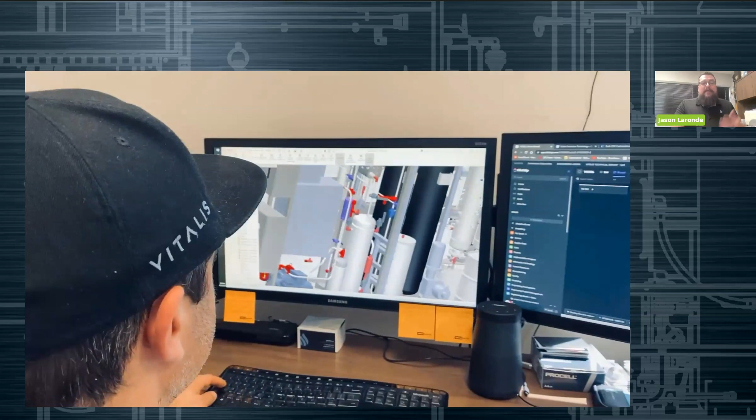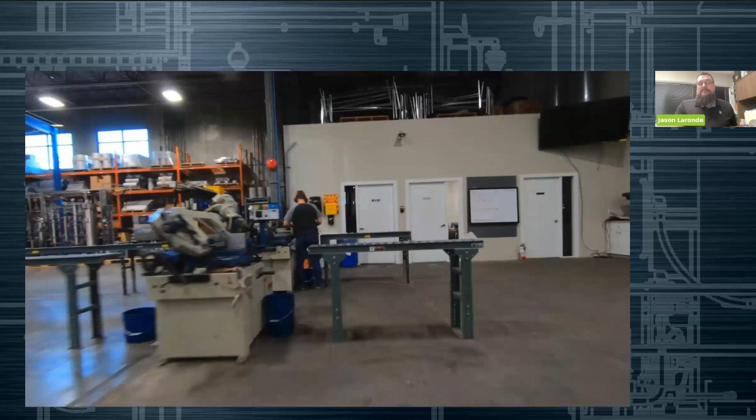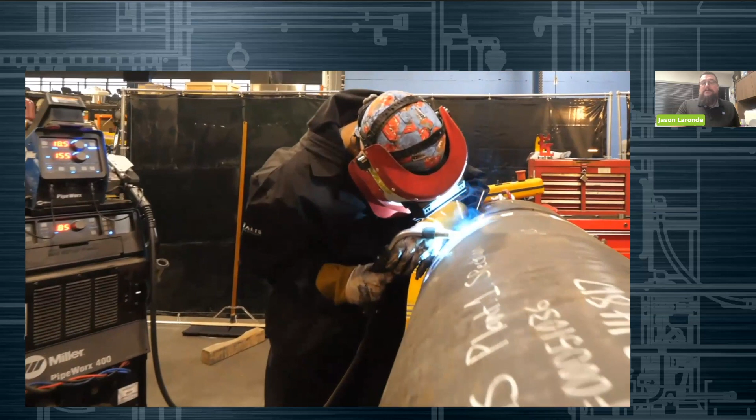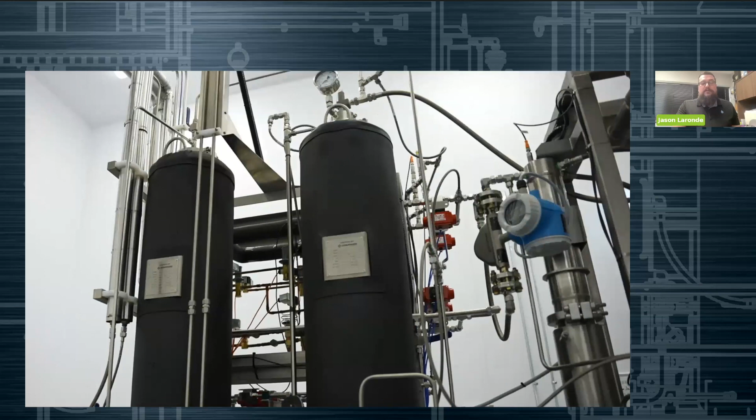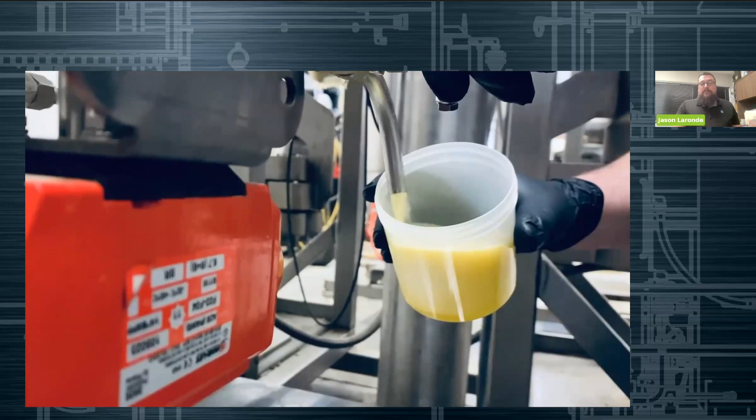Our mission is to help producers thrive while becoming more resilient and future-proof. We do that by utilizing unique properties of CO2 in a number of different ways, like extracting and refining natural ingredients from biomass, or employing CO2 as a heat transfer fluid as a natural refrigerant, or recovering and distilling CO2 for repeated use in applications ranging from extraction to brewing and high-proof spirits. We have over 150 installations on 5 continents, and our CO2 expertise is recognized worldwide.

I am Jason Laronde, Sales Manager at Vitalis, and I am your host for today's webinar. I joined Vitalis shortly after its inception in its lead up to the federal legalization of cannabis in the Canadian market. Since then, I've had the privilege of working on nearly 100 deployments of our 150 installs across 5 continents, with customers ranging from the largest multi-state operators to multiple EU GMP certified facilities actively distributing pharmaceutical products across the globe today. I have been a key member of the launch teams that have brought commercially successful co-solvent extraction to the market, automated inline refinement, and R744 natural refrigerant technologies to the cannabis and many other industries.

Today, I am privileged and would love to welcome Mark Webb, renowned chemist, educator, and extraction specialist, as a special guest. Mark. G'day, guys. And if you hadn't worked out, I'm from Australia, the land down under.

Since the early days of the cannabis industry, the wholesale and retail value of cannabis and its derived products have steadily declined, and what was once referred to as the heyday has now reduced to levels that make profitability extremely challenging, particularly with equipment and processes that at one time made sense, because the economics were so disproportionately profitable that basic business fundamentals didn't really matter to be profitable. This, along with many other factors such as taxes, regulation, a flood of other players to the market, and increasing investor sensitivity, has had a serious impact on the value and perceived value of companies producing cannabis products.

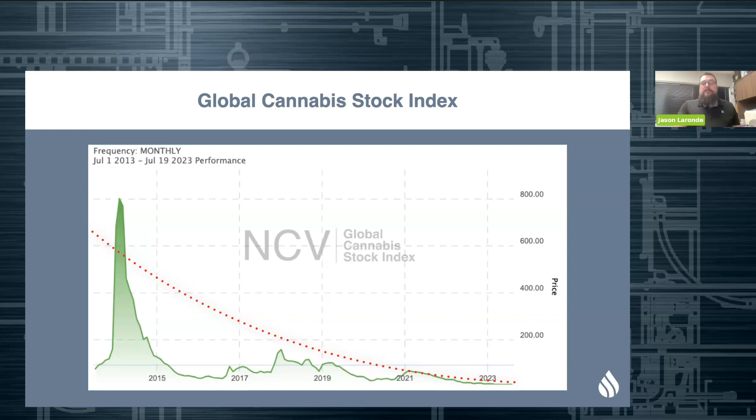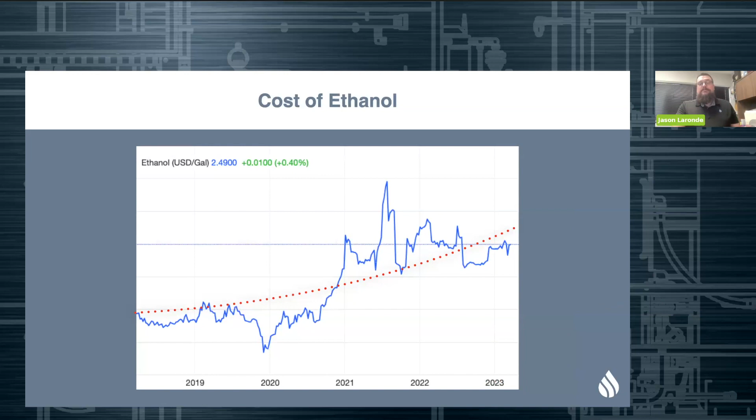In that time, the cost of goods sold has increased steadily. Consumers and consumables such as extraction solvents have increased significantly, and the average wage and benefits to employ the people that make these products possible has risen faster than nearly any other period in history.

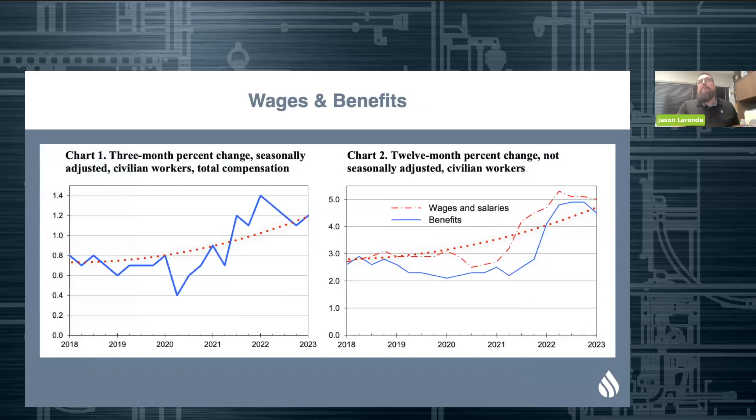As a result, many producers find themselves at a crossroads between their cost of goods sold and the price compression that for many businesses clinging to their current methods of production is unsustainable. New technologies that reduce the time to produce, decrease the headcount required, reduce consumables, eliminate steps in post-processing, and allow producers to manufacture more SKUs with less equipment is one of the largest levers forward.

There are a number of processes available, with the most common in the traditional sense being CO2, ethanol, hydrocarbon, and solventless methods. Every processor will have a champion that will tout the benefits of one or the other.

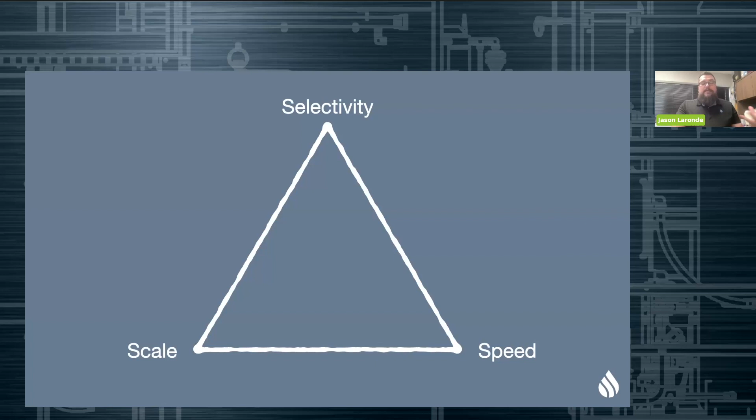Ethanol has been a great go-to strategy for some of the largest players in the industry, but with the trade-off of extremely costly solvents, high energy costs to refrigerate, recover, and purify this solvent for reuse, and the need for facility safety improvements that can evaporate any cost savings that the capital equipment originally afforded them.

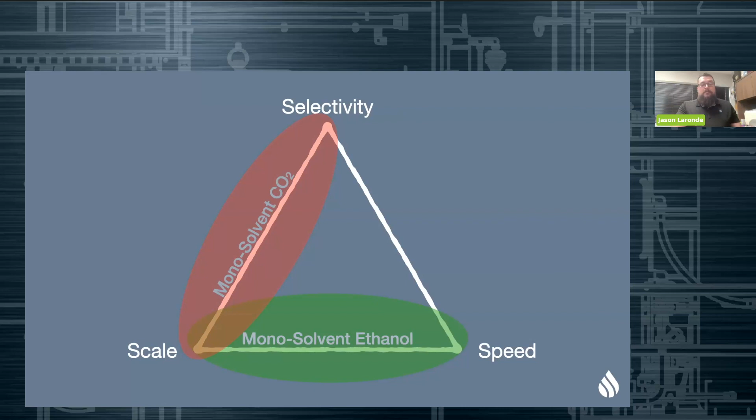CO2 monosolvent, or CO2 by itself, or supercritical CO2, has always been known for its selectivity, and in some operations, its terpene retention and its product purity, but usually with extremely high capital equipment costs upfront and additional post-processing equipment downstream.

Hydrocarbon extraction, while capable of making some extremely desirable products, in almost all cases carries with it limitations with scale, some of the highest and most costly facility safety improvement requirements in the industry, and in many jurisdictions, it's not even permitted. Above all, everything I've just mentioned is the same calculus that every player in the industry is weighing.

So if you think that you have an edge in your market using these common methods, understand that your competitors have the exact same options available to them with the same economics. Solventless extraction can create some extremely high valuable products with minimal equipment, but with the trade-off of catering to a smaller overall market segment.

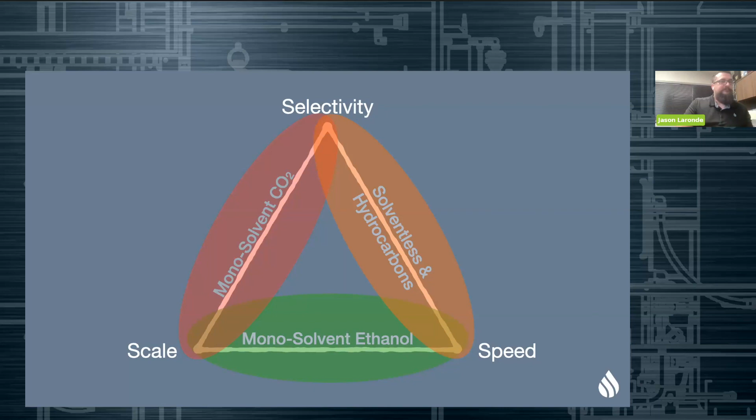Vitalis launched its Cosolvent injection system, the first of its kind to use a unique combination of extremely low pressure subcritical CO2 and very small injections of ethanol to provide its customers with selectivity, scale, and speed where other manufacturers have failed to deliver.

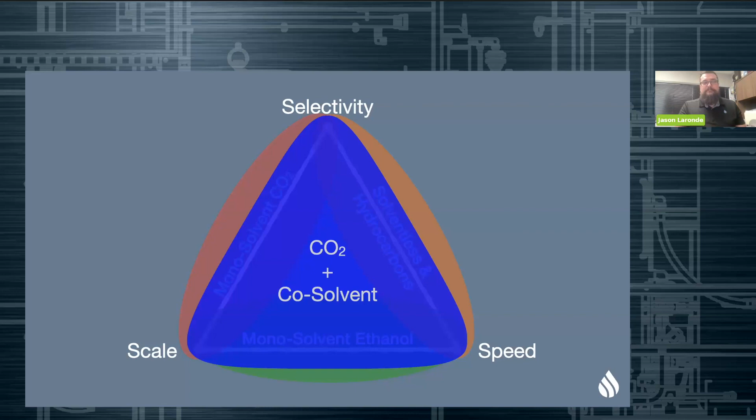Now, data is king, and here we show some of our early R&D results from the development of this product. One of the first unlocks was the rate of injection.

At even 2% injection of ethanol compared to the volume of CO2, extraction times were already significantly reduced while retaining an incredibly high product quality.

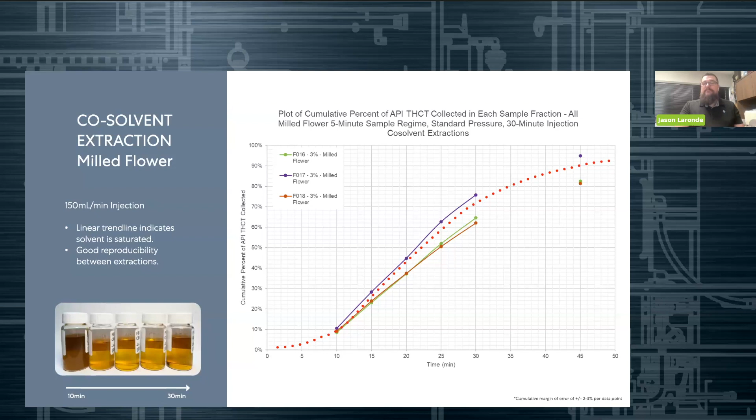At 3%, product quality was retained and speeds were increased even further to achieve nearly 90% recovery of available cannabinoids in only 45 minutes. And at just 4%, increasing the productivity slightly more, sliding the recovery curve further to the left,

allowing customers to weigh the value of their input product, the value of their output product, the additional cost of the small increase of consumables going from 3 to 4%, and the value of the few minutes saved in labor to determine where the cost to produce versus the value of produced intersect. Every market is different, but customers can now achieve greater than 90% efficiency with a cost to produce that was previously unattainable.

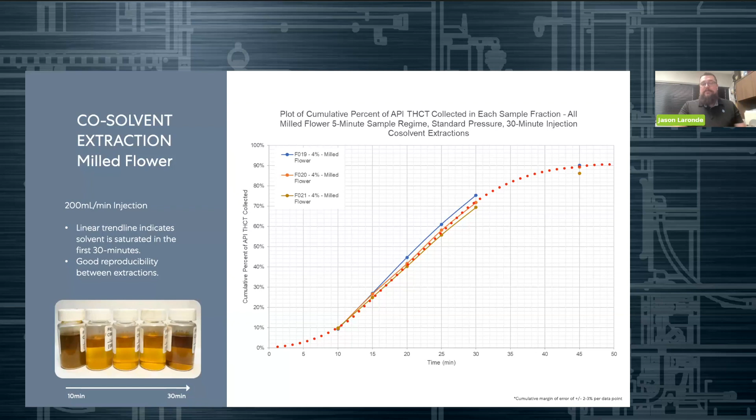What kind of cost to produce? Well, Vitalis doesn't want to present you with shiny marketing material. We'd rather show you the math and have extremely comprehensive calculators that demonstrate the economics of the process. Every variable, kilowatts of electricity, labor headcount to operate, vessel load values, consumables, maintenance intervals.

These are all hard values for every piece of our equipment. The variables, though, are yours. What is your labor rate? What is your rate for electricity? If you provide us with these and a few other figures, we can calculate to a pretty accurate estimate of what your total cost to produce will be.

And here is an example of an actual lab running our Cosolvent system today. And the cost of electricity, labor, consumables, and maintenance to run the extraction operation calculates to just 5.2 cents per gram.

Tell us your cost of your input material and the value of the extract that you then would produce and sell into your market. And excluding facility overheads, we can give you a pretty good idea of what your margins will be. And in any scenario, if your extraction process costs you more than 5 cents per gram, you need to call me.

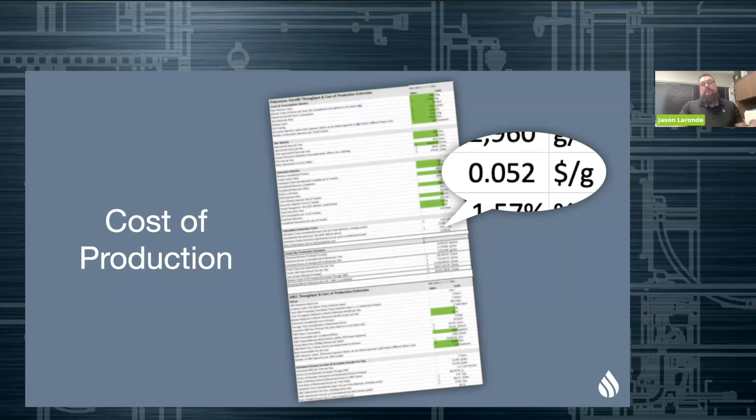So what does this process look like? The extraction operation uses CO2 only, at extremely low pressures and temperatures, far lower than any other manufacturer on the market, to pull a terpene primary extraction. This is performed in only a few minutes and allows you to create a high purity terpene that was never subjected to ethanol, with no post-processing, and these are set aside.

The extraction system then starts the cosolvent injection to accelerate the extraction process to run times that were previously only available to operations like hydrocarbons and ethanol.

At the end of the SOP, the ethanol injection is stopped, and the CO2 extraction phase, called the ethanol reclaim, essentially extracts whatever remaining ethanol is in the biomass. This leaves you with a depleted, dry, ethanol-free waste product that does not need to be remediated, dried, or processed in any other way, and can be carted away just like any other solventless or CO2 raffinate.

Finally, the CO2 that remains in the system under pressure is recovered so the system can be safely opened, unloaded, and reloaded for the next cycle. Nearly all Vitalis configurations have at least 2 extraction vessels, so the next vessel can already be preloaded in preparation for the next cycle.

What used to take an entire shift using only CO2 can now be completed from startup to shutdown in about 80 minutes, and much less if terpenes are not a target compound during that operation, or when the second vessel is loaded and ready to cycle.

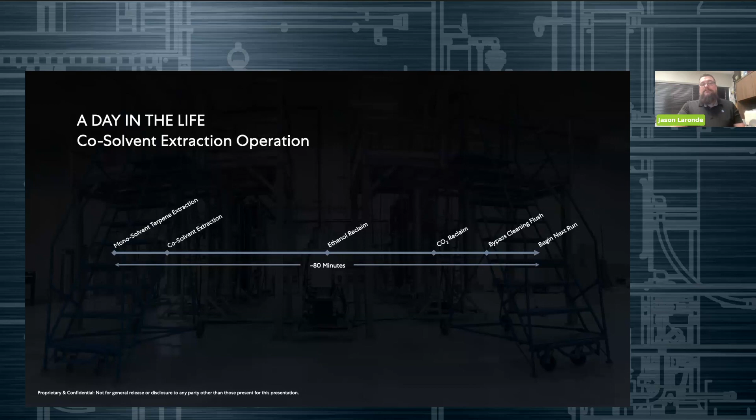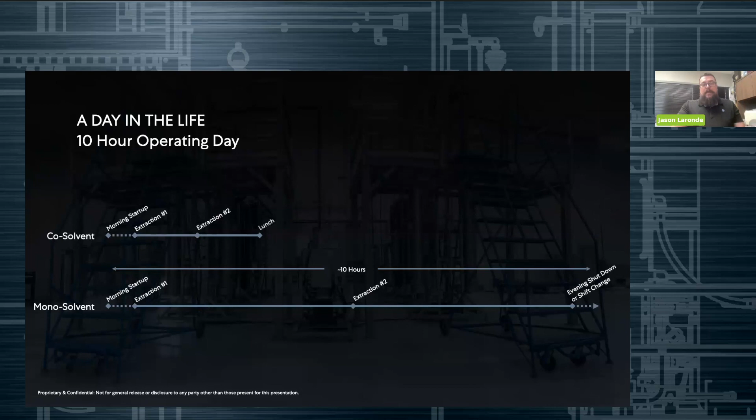Over the course of a regular workday, what maybe would have been 2 extractions can now be 7 or more. And if your operation isn't looking to 4 or 5x your throughput, this means you can consider a much smaller piece of equipment compared to other offerings on the market and still achieve the same real world throughput. And of course, with a large piece of equipment with the idea of scaling in the future in mind, you could just have an operation that did your 2 extractions and be done by lunch.

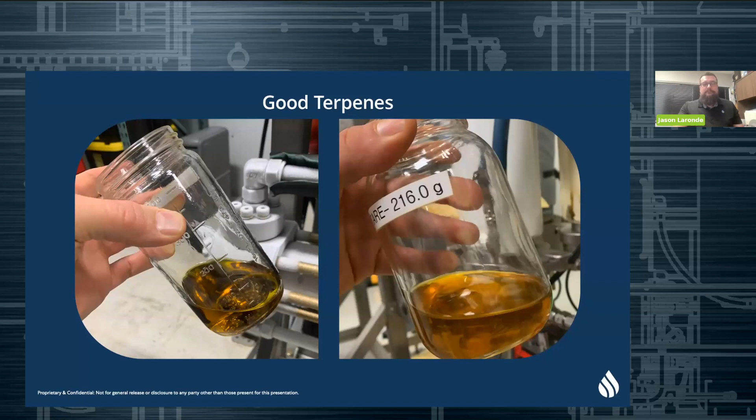The consistency of cosolvent extract is extremely easy to work with, and what was previously high in wax content now is a homogenized mixture of extract and ethanol that can immediately be processed in the lab. There is no additional ethanol to add in the lab. There's no post-processing homogenization. Vitalis cosolvent extract goes straight into the freezer, and with a wax content of between 1% and 2%, and about half of the ethanol used compared to traditional CO2, precipitation, filtration, and solvent recovery takes hours, not days.

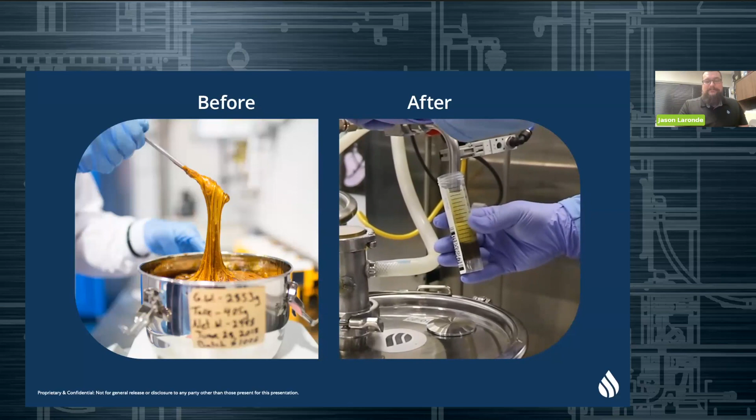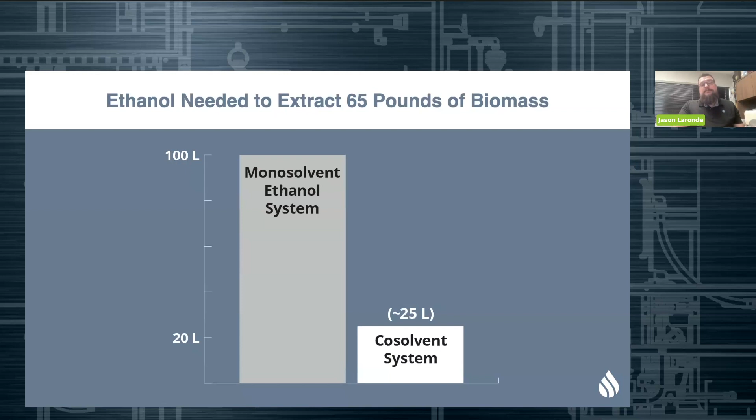If this were a cryoethanol extract, the ethanol to be recovered and the energy required to do so could be 4, and in some cases 10, times the amount of a cosolvent operation. And other co-extracted products, when using things like cryoethanol, like color or sugar, being a problem for lab equipment and other downstream processes, are not an issue with the Vitalis cosolvent extraction system because of our design, demonstrated with analytical testing.

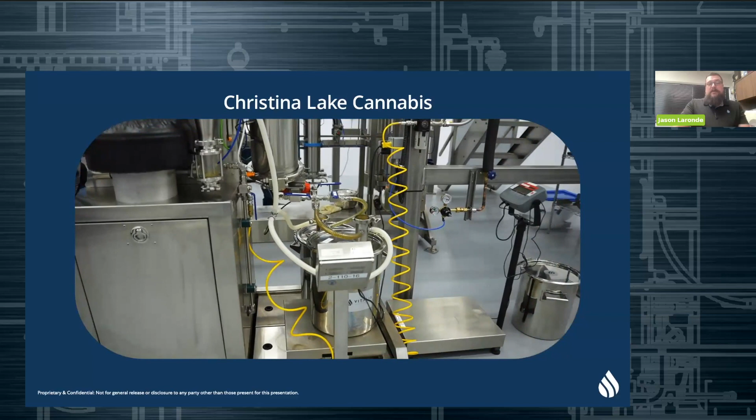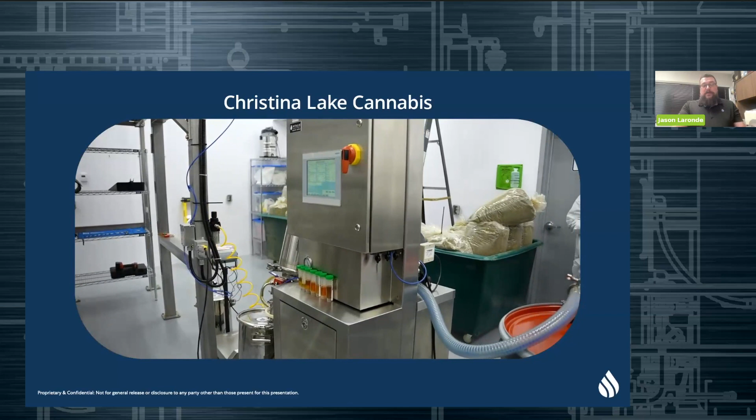Some of the largest multi-state operators in the US have standardized their extraction process on the Vitalis cosolvent injection system, with one executive sharing: 'We have nearly every extraction method available in our labs spread across the country. And in every analysis we've done, the Vitalis outperforms in product quality, throughput, and cannabinoid recovery by a country mile.'

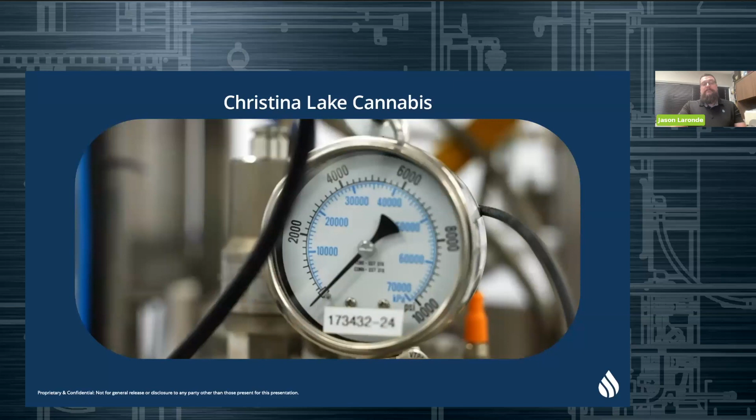Large commercial producers in Canada, like Christina Lake Cannabis, one of the largest producers of THC distillate nationally, were early adopters of the technology and continue to churn out gallons of extract to the Canadian market day after day.

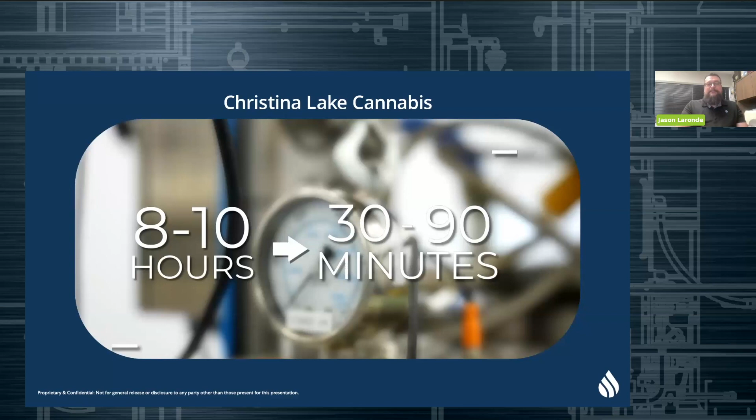The Cosolvent injection system is available as a standalone product and can easily be added to any Vitalis currently in the field, either our Q or R series.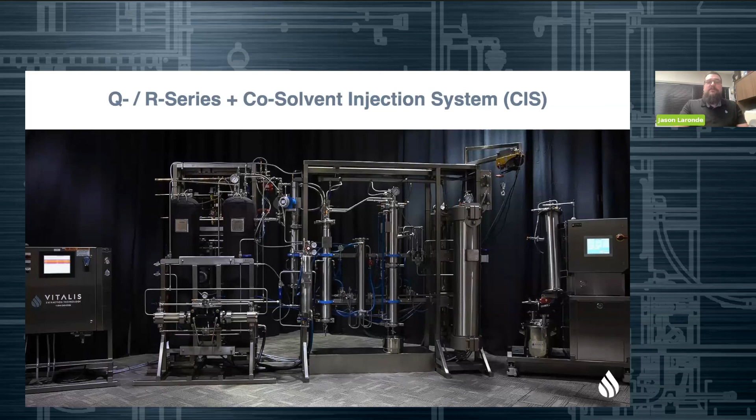Vitalis has just launched its latest generation of extraction products in the Polaramax series, spanning units as small as a single 10-liter to multiple 200-liter columns. Remember that due to the extremely fast processing capabilities, liter for liter can no longer be the comparison. A Vitalis 10-liter would need to be stacked up against a 50-liter or larger from a competitor to match the throughput, affording you the ability to save footprint, utilities, and upfront capital cost compared to the traditional way of processing.

In addition, Vitalis manufactures completely automated inline refinement skids that mate directly to the output of the extraction to give you the option for a completely end-to-end, fully automated plant-to-product with a single operator.

Using our knowledge and expertise in handling CO2, we also have a broad range of packaged and custom R744, or CO2, natural heating and cooling heat pump solutions in response to increasing restrictions on the use of synthetic refrigerants and the extremely high performance that R744 affords.

Finally, our newest product line to just launch is the Freecovery, designed to mate to nearly any CO2 source for the capture, cleaning, and on-site storage of capturable CO2, such as the output from a competitor's extractor that dumps large quantities of CO2 to the atmosphere, fermenters in breweries and high-proof spirits, or industrial processes.

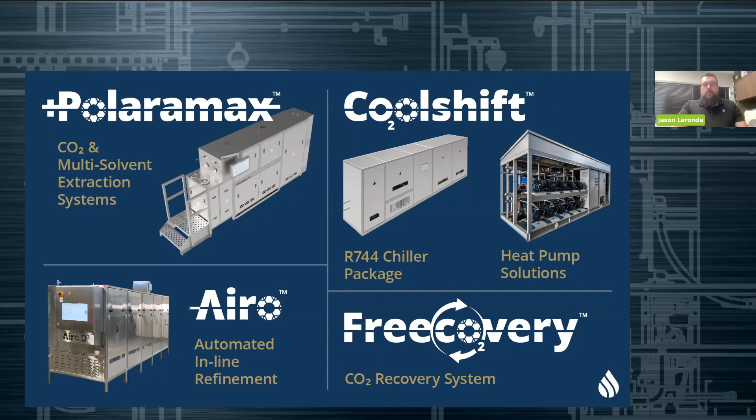At Vitalis, we strive to bring truly beneficial technologies to our customers. We try to prove the performance of our equipment to our customers to show what it can actually do to your business. The outputs that you get from our account managers and engineers when selecting a piece of equipment for your particular operation comes with data that you can confidently plug into your ROIs and your business plans, and feel confident that Vitalis, as a global manufacturer and supporter of our customers with sales, service, and support across the globe, is an excellent partner for you.

And with that, I would love to open the floor to any questions that anyone might have.

Right. Perfect. Awesome. Thank you so much for going through that, Jason. I loved all the visual imagery that you had incorporated into that presentation. Thank you for working with your team to develop all of that and present it in such a visually appealing way for the audience members.